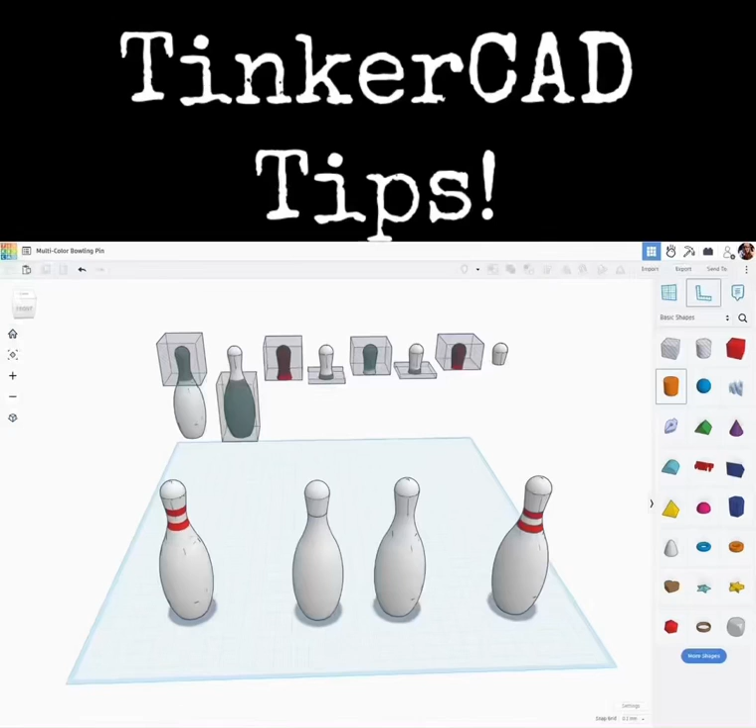TinkerCAD tips. Welcome back. This is part 2 of this multicolored bowling pin.

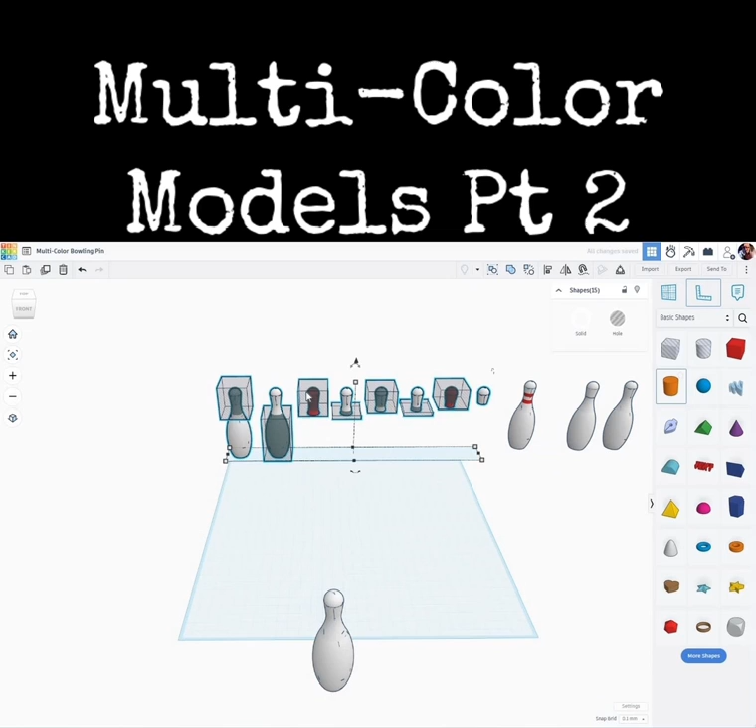So let's zoom out here. I am going to grab a copy, a duplicate of this pin here, and the rest I'm going to move up out of the way. Back here, I kind of have an example of what I'm going to be shooting for. And I've shown this technique before. This is a way of splitting an object in two, and I just did it in a series of steps.

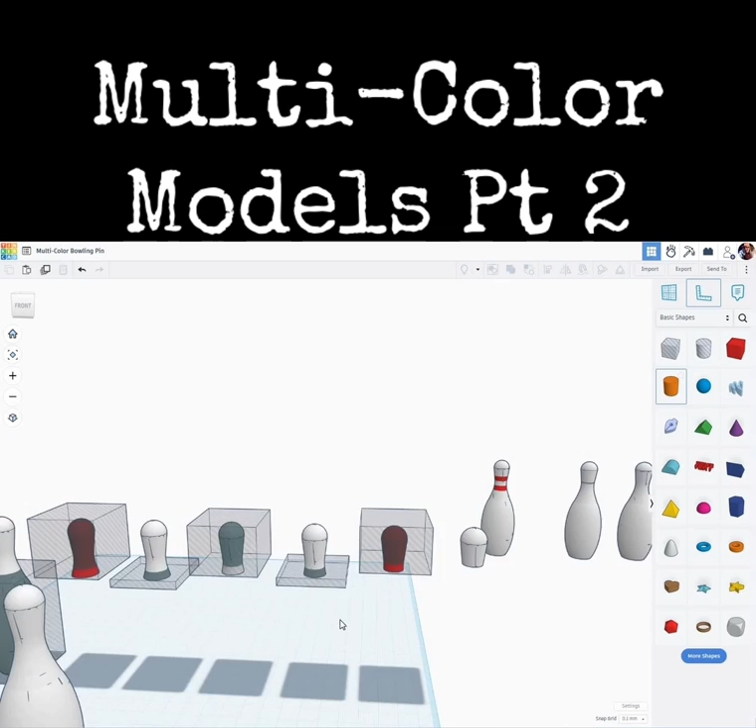You can see here where this was a duplicate, and then I did that so on and so forth as I went through the parts, which then gave me each section in the color that I wanted. So let me step you through how I did that. I'm going to select all of those, kind of slide those up out of the way, zoom in, have our bowling pin here. Okay, we're going to start by grabbing a hole box, dropping it down to the work plane.

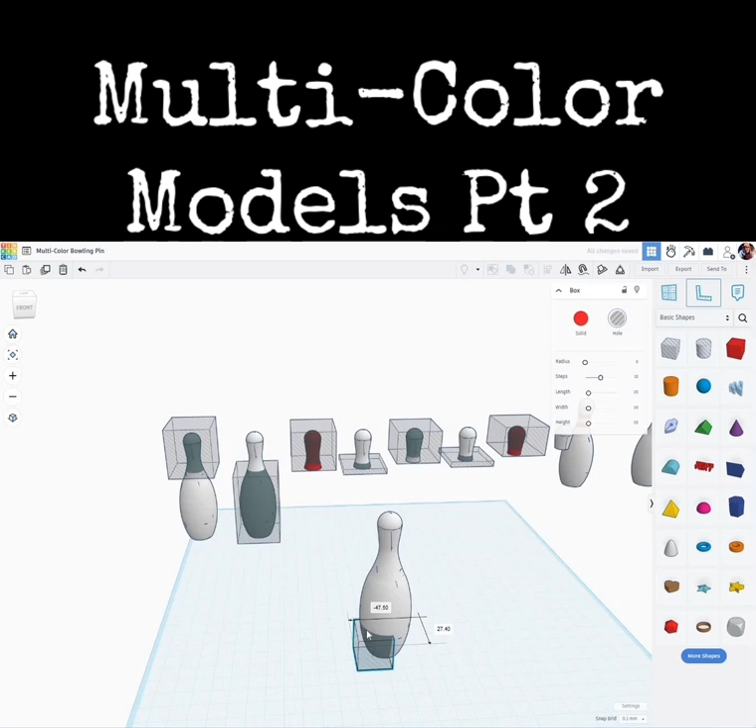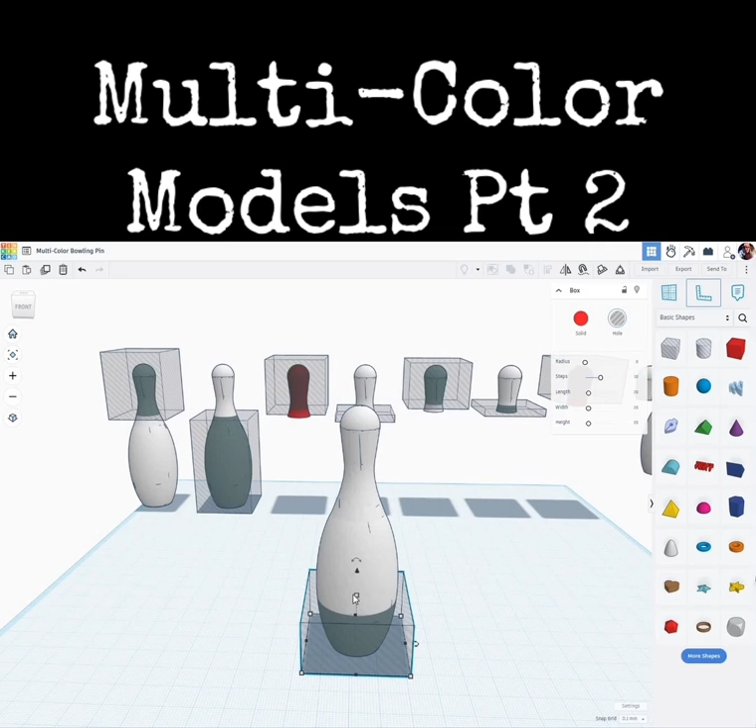Let's move it over here, come around to the side. We want this to be larger than the bowling pin itself. Let's make sure we have enough back here. There we go. I'm going to select the two of those, do a quick alignment just to keep things square here. All right, now I'm going to grab that hole box and I'm going to bring it up to where I want the white to end. Let's say right about there.

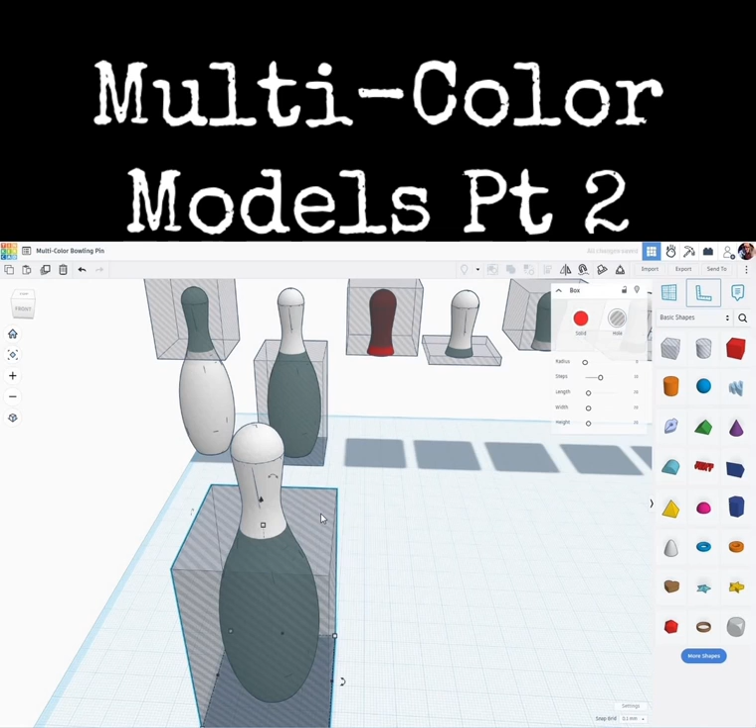Okay. Now I'm going to lasso select the two of those. I'm going to drag it over here for a moment. I'm going to zoom in. I'm going to select on just the hole box, hit Control D to duplicate, click W. Let's put the work plane there, hit the letter D to drop. So we have our duplicate. And that duplicate I'm going to bring down till it just covers the top of the bowling pin.

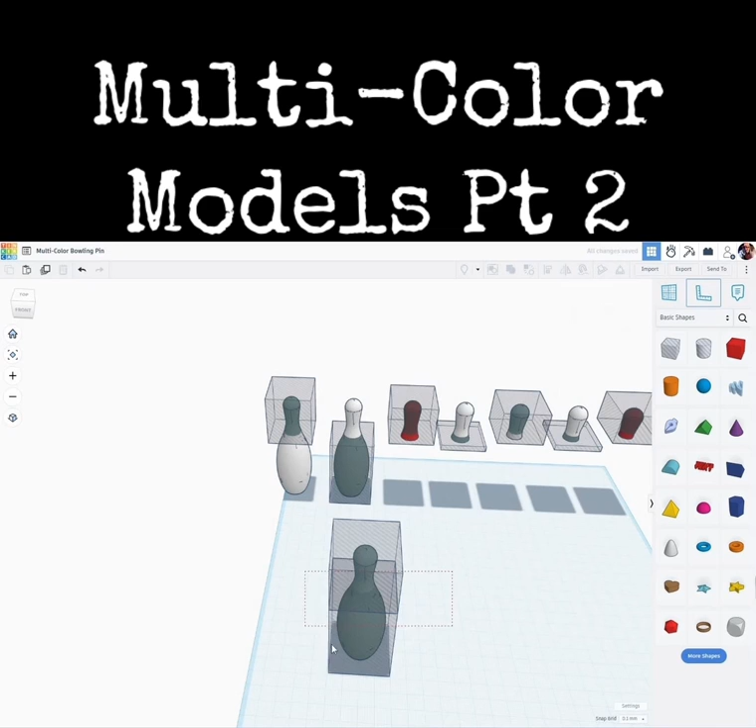W. I'm going to zoom out here, hit W, put it back on the default work plane. Let's grab all of that, slide it over. Now, while I have that all selected, I'm going to hit Control D to duplicate. I'm going to shift nudge, shift cursor, and bring that copy over here. All right, so now what I want to do is keep the white portion of this bottom here. So I'm going to delete that.

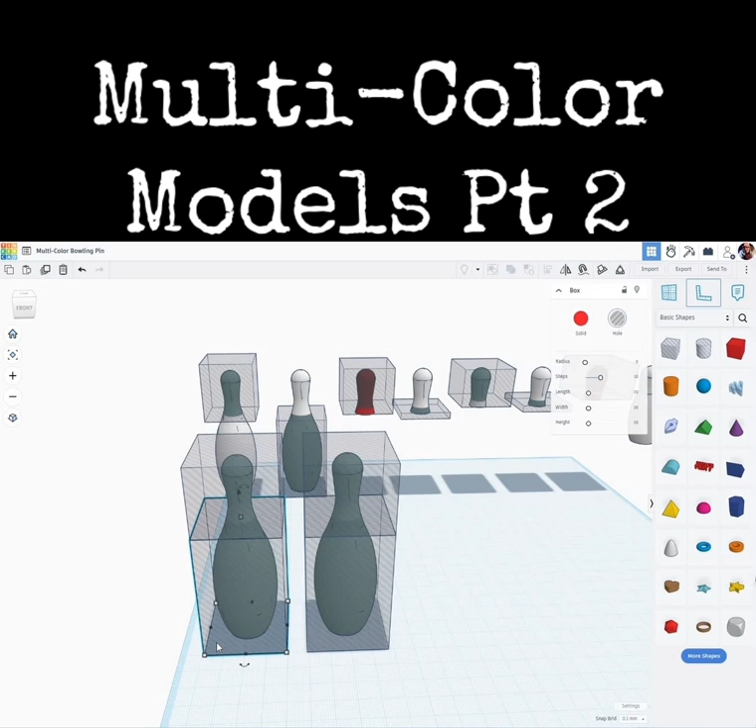Okay, now I can lasso select the two of those objects, click Union Group, and that gives us the white bottom portion. Over on this one, I want to select the top here and delete that, leaving just this white part. I'm going to select the two of those, union group them, leaving me this white portion here. So we're just going to kind of repeat the same thing again. I'm going to bring out another hole box. We'll enlarge it just a wee bit.

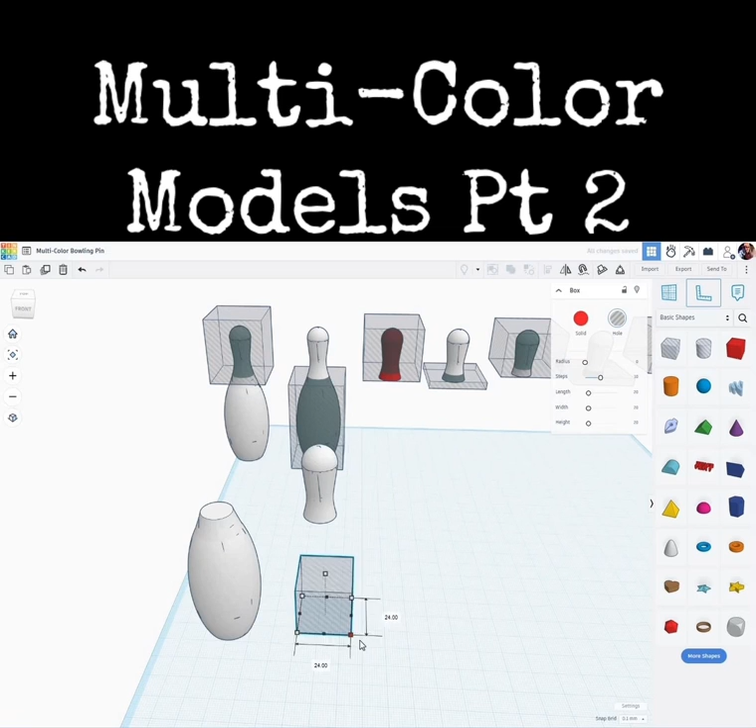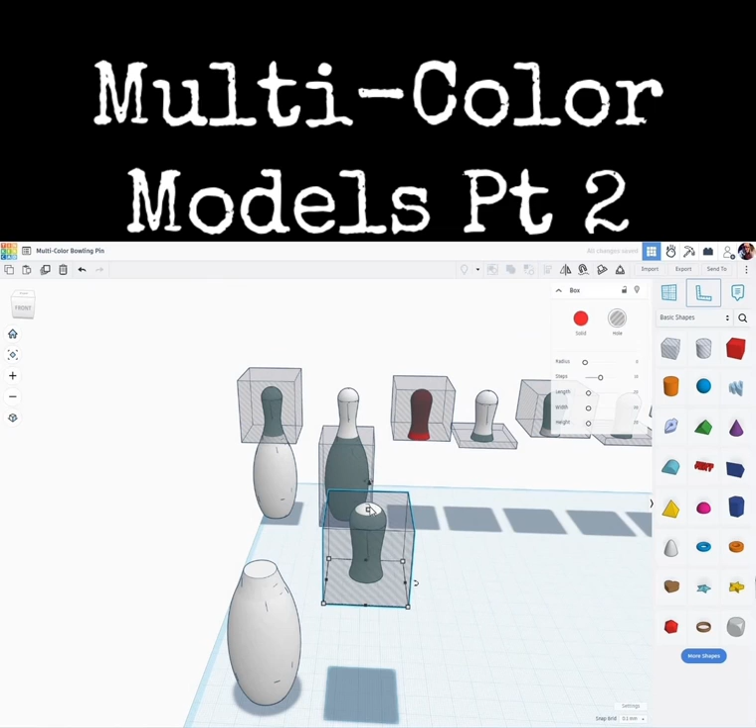Let's drag it up a bit. All right, I'm going to go ahead and select the two of those, do a quick alignment. I'm going to click on the white one to keep it in place in that direction. Okay, we're going to sort of do the same thing here. I'm going to take that hole box. I'm going to change the height to where I want the red to be, about the height of the red portion.

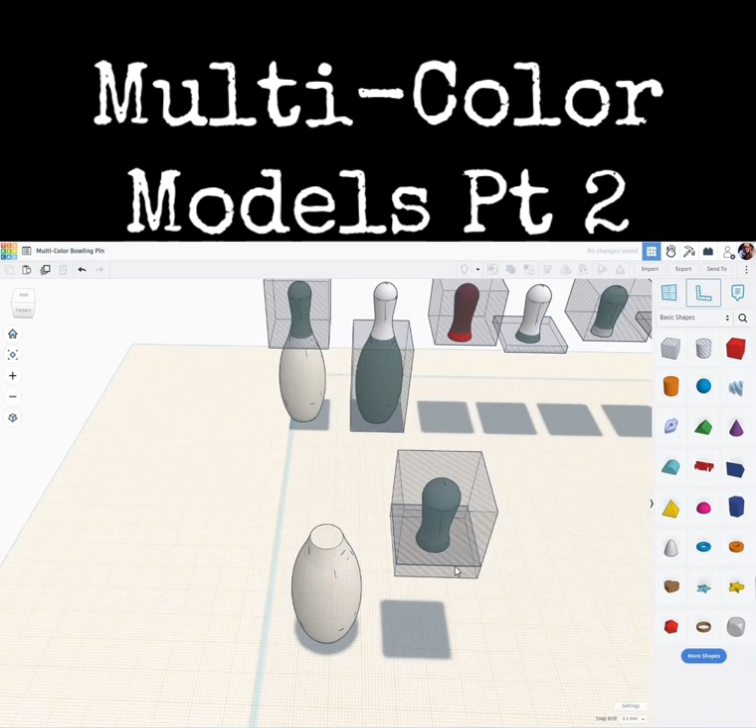Control D, W to place the work plane on top of it, D to drop it, and then I'm going to bring the height up to cover both of those. I'm going to zoom out. Let's put my work plane back out here. I'm going to select all of that, Control D, Shift Nudge. Make a complete copy of that.

I'm going to come back over here to this. I'm going to select down here and hit D. I'm going to select the two of those, union group them together, and I'm going to make that the red part. Okay? Now I'm going to come back over here and I'm going to delete the top of this one, and I'm going to union group the two of those together. That's part of the next part that we're going to be working with. So you see how I just keep repeating this.

We'll grab another hole box here. Let's bring that over here where we want it. We don't want that piece there. Whoops, undo. Okay, let's bring out a hole box. We'll enlarge it a little bit. I'm going to shift select that pin, the top part of the pin. Click Align. Click on the white part to keep it where it needs to be.

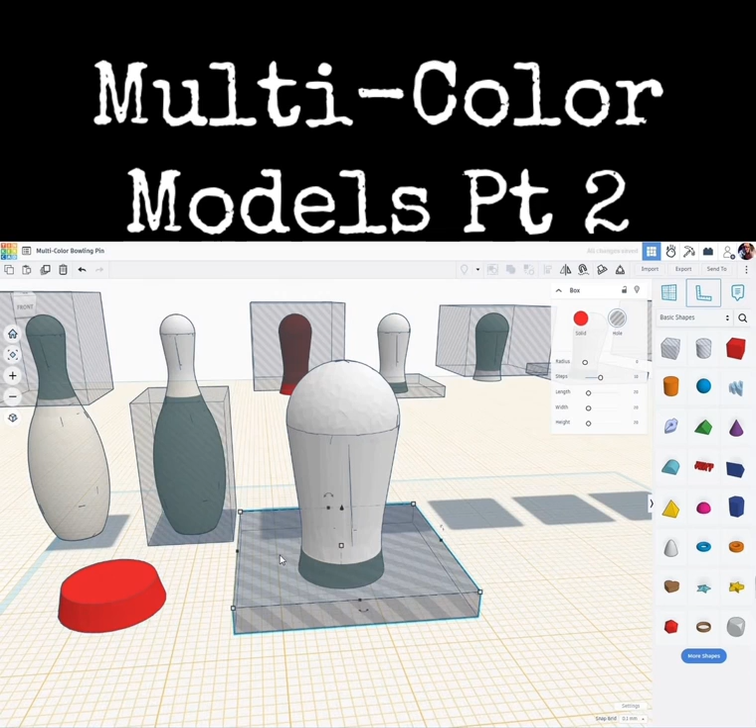Well, let's do that again. Select the two of those. Align. Top part. All three directions there. All right, the next section will be white, so we'll bring this down to the height of the white portion, the next ring. Okay, I'm going to zoom in. Control D. W, we'll put the work plane there. D to drop. Going to bring that up.

Okay, W, let's put the work plane back out there. All right, I'm going to select all three of those. Control D to duplicate. Shift nudge. Let's bring that over here. Let's come back to this one. We'll delete that box. Whoops, undo that, wrong way. We want to delete this bottom box. There we go. I'm going to select those two, union group, and now we have the next white portion of it.

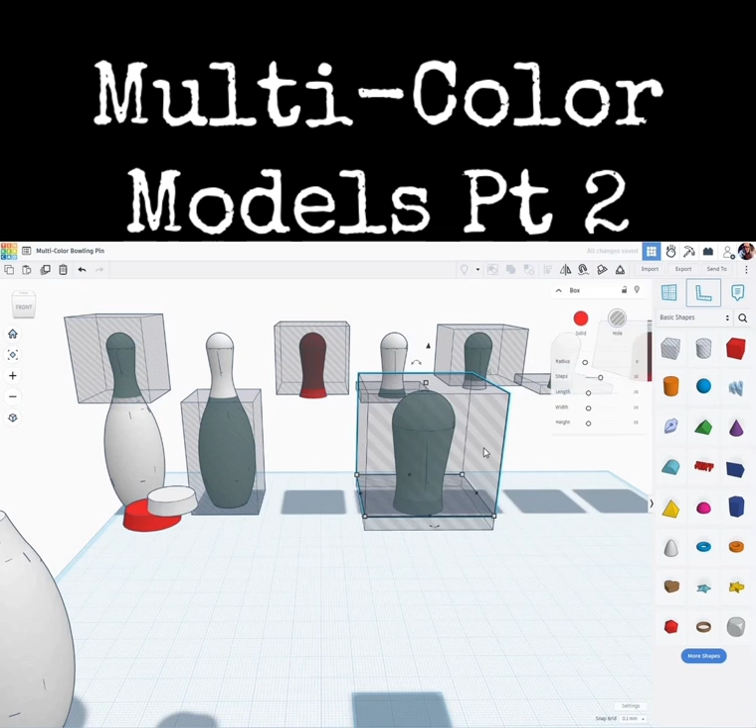We're going to come back over here, delete the top part, shift select the two of those, union group, and so on and so forth. We just continue to do that until we have all of the parts that we want, similar to this one here. Now what's unique about this, once you have all the parts, and I'll ungroup it here, you can see it's all in separate parts. Each one of these is a separate object. Oops, I don't want to ungroup that. Each one of these is completely separate, okay?

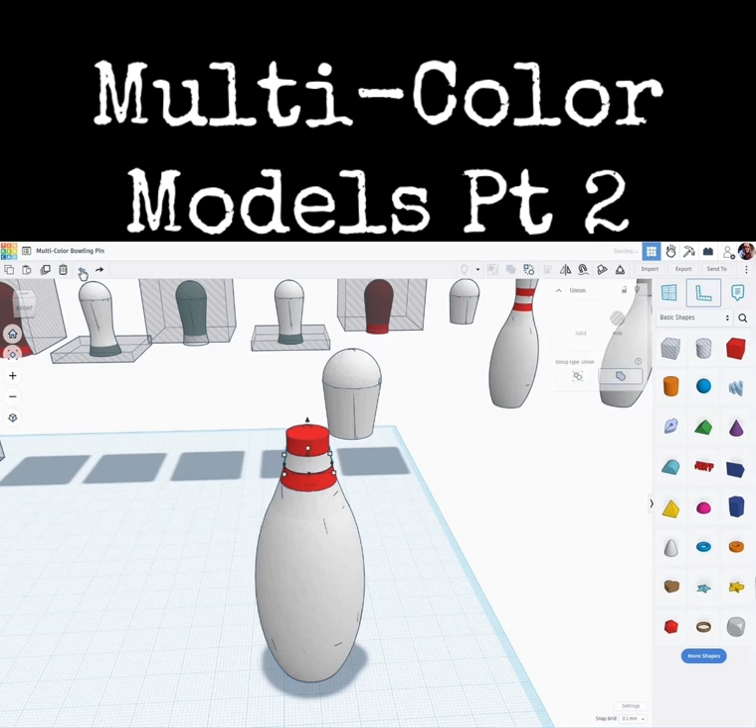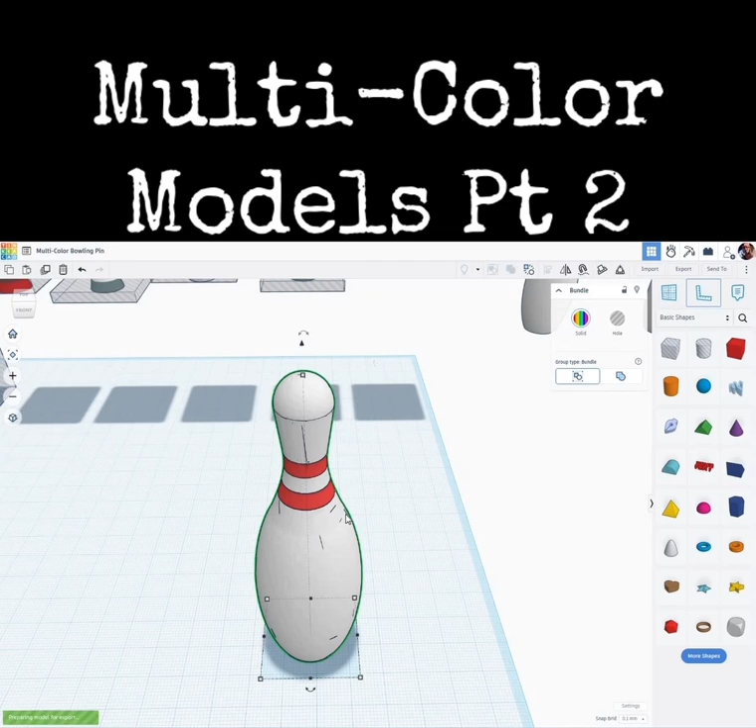Now what we do, in order to take advantage of all of that, there we go, got it all back in place. I'm going to select everything again. I'm going to do a bundle group. Now that we have that, I'm going to select it. Now we're going to do our export, but this is a little different. Instead of an STL, you want to do an OBJ. Here I call it multicolor bowling pin zip. It'll be a zip file.

You'll click Save. You'll go to your folder. Here we have our zip file. I'm going to extract that with 7-zip to a separate folder. And if you then go into that folder, you'll have these. This one here, the OBJ file, is what you want to import into Prusa or Bambu Studio. It should present you with a dialog where you can then select which filament spool in your AMS unit you want to associate with the various parts in the model. So, there you have it. Multicolored objects and two different ways of going about it.